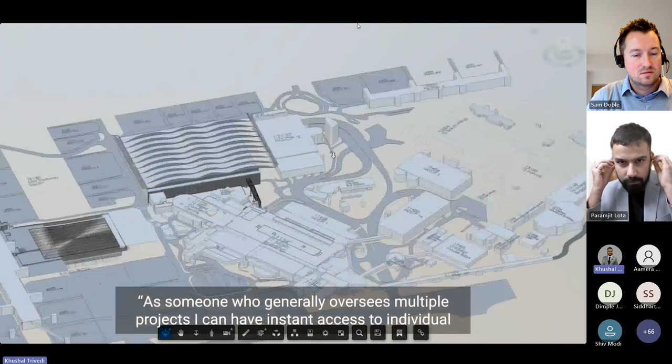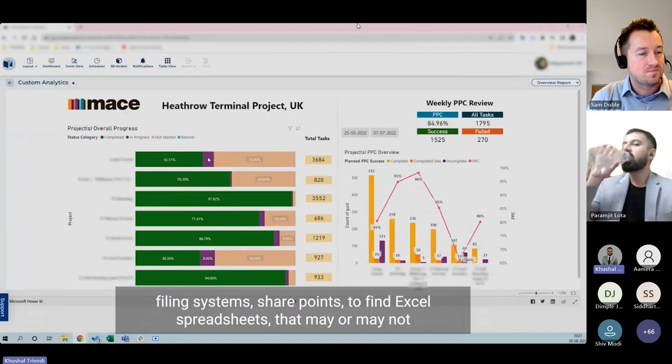A digital tool, the benefit of having that is the single source of truth, to keep everything in one location. As someone who oversees multiple projects, I can have instant access to individual projects at the click of a button. Whereas before that would mean trawling through filing systems and SharePoints to find Excel spreadsheets that may or may not have been uploaded by certain individuals, I can now be given access and click on the tiles to see the performance of those projects.

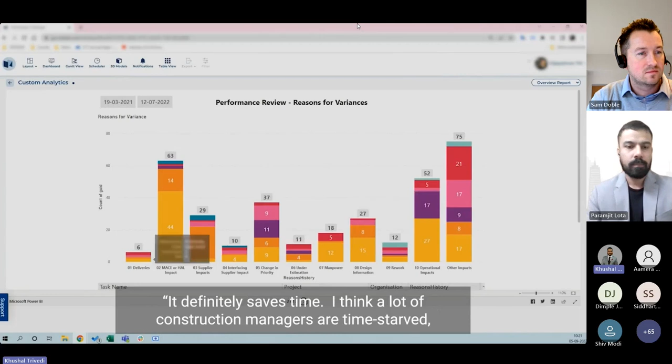It definitely saves time. I think a lot of construction managers are time-starved, so the more time they can save, the more they can get done. And I think the main benefit would be if you can get out of work by 6 o'clock, get home, have your dinner and relax for the evening - you're far more productive.

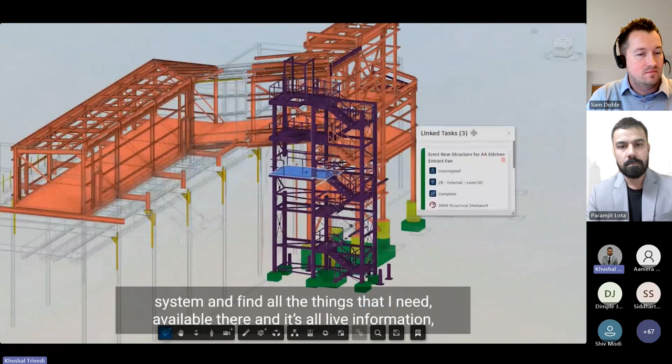A digital platform such as VisiLean is very optimal because I can actually log on to the system and find all the things that I need available there, and it's all live information, so I'm not looking at past data.

The two biggest benefits would be within our construction management team. Traditionally, our construction manager would have to collate dozens of spreadsheets into a single format to then present and coordinate within a meeting, and then all of those outputs had to be manually put into graphs and charts to identify constraints and reasons for delay. That was a very manual process up front and at the tail end of it as well.

With bringing in VisiLean, there is none of that at the front end. It's all accessible either by an app or on the computer. It can be done daily or weekly, whatever time frame suits, as long as it's there for the meeting. There's no having to bring that together - the software does that for us. And post-meeting, the dashboard, the outputs, the constraints are all just there for all to see.

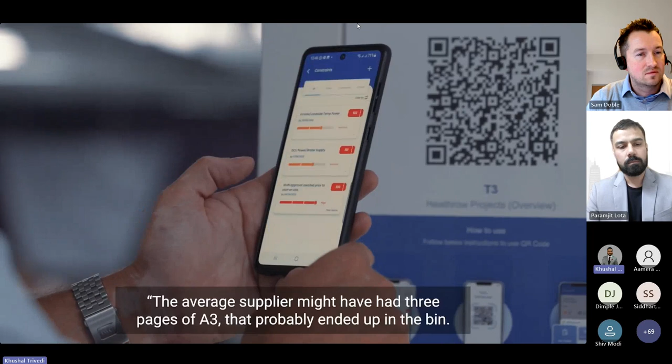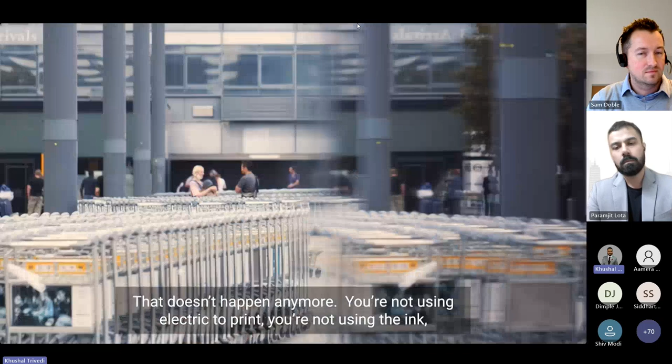The average supplier might have had 3 pages, A3, that probably ended up in the bin. That doesn't happen anymore. You're not using electric to print, you're not using the ink, and you're not using the paper, because it's now on the screen. So there's a benefit there.

The VisiLean software and the way we're using it is used to plan the works very well. It's collating everybody's activities, linking it to a program, which was never really done before because they were separate platforms. It's the same process, but digitally made easier to do. There's all those little benefits that nobody sort of sees - sometimes they just look at VisiLean as the global.

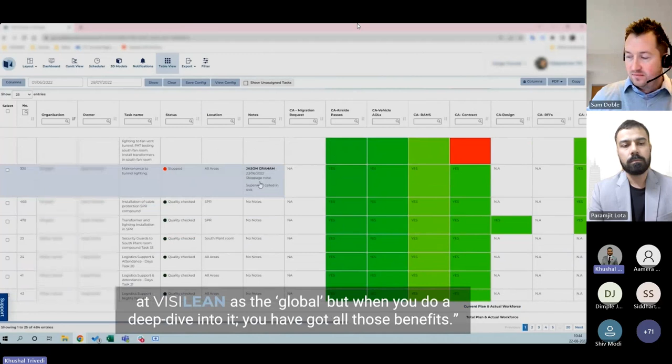When you do a deep dive into it, you get all those benefits. The VisiLean platform is ideal for any build project. It could really be a one-stop shop, growing on from where we started. I find VisiLean to be very user-friendly, very collaborative and very helpful. If I send an email to VJ or Darren or another, I've generally got a response very quick, and that's a breath of fresh air.

The whole VisiLean package fully understands that there's a lot of people out there who haven't been brought up in a digital age and they need to be helped along that journey. The important thing is you've got the support. A system is only as good as the support behind it, and I think with VisiLean, the support they give is superb.

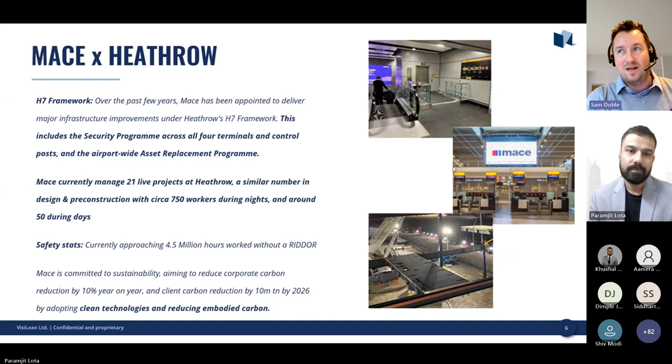That's a 5-year framework, the spend plan essentially that Heathrow say they want to spend on upgrading and maintaining the airport environment. There are other delivery partners at the airport - we've got Costain, Ferrovial, Volker Fitzpatrick, and others coming in. Those are some of the key ones, but we are by far the biggest, with by far the biggest amount of work there.

Under the framework, we've got to deliver the terminal security upgrades program across all 4 terminals. You may have seen in the news that there's a mandate where next summer the airport has to allow a 3D scan of all the bags - when you go from landside to airside, bags are scanned on a 3D image rather than just 2D. So all the machines, the CTIX and ATIX lanes, need upgrading throughout the airport, to lift the level of control up.

From that point, you'll be able to take laptops through without taking them out of the bag, and take drinks or liquids through in excess of 100ml. That will be a result for everybody. It's something we're doing at Heathrow across all terminals, going very well - there's about 150 security lanes to upgrade, including colleague search lanes, passenger search, royal suites and other areas. That's airport wide, a huge program worth about 250 million in turnover overall.

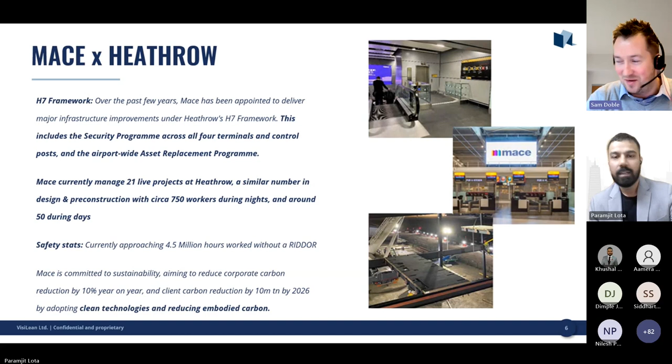Thanks a lot, Sam, that's fascinating. Before you tell us a little bit about how technology has been helping, just on those projects you described for us right now - typically what sort of duration are you looking at? How short can these be, and what do they typically go up to? Are you talking a week, a few weeks, or typically 3 months? What are we thinking?

Good question. So probably the longest project we've got at the moment is the cargo tunnel, which is the one we're going to go into in a bit on the case study.

That's a 3.5-year program as it stands. Generally, we have terminal security projects going on for quite a while at the moment because they're very piecemeal, done in a logical fashion. We're upgrading all of the security lanes, but you have to do it in a staged fashion because we've got a minimum throughput that's got to be maintained throughout. When you start taking lanes out to put new ones in, you're reducing passenger numbers going through. So they're a very methodical, sequenced approach with multiple phases, spreading out for 2 to 3 years. Then coming back the other way, you've got some projects delivered in maybe 3, 4, 5, 6 months - really depends on scope. But if you took an average, you're probably looking at about a year duration of projects on site.

And prior to that, there's all the pre-construction design that we get involved in. So even if it's a small job, the quantum itself is so much that it will take you time, and the planning and the way you're going to deliver it is going to be spread out. We quite often have to explain to the client, whether it's a small job of £500,000 or a £100 million job, it's still the same planning, it's still the same process you have to do. Even though there's less work to do, it's still the same process for teams to go through.

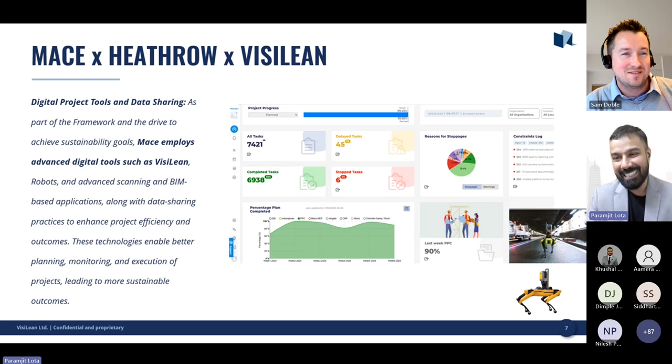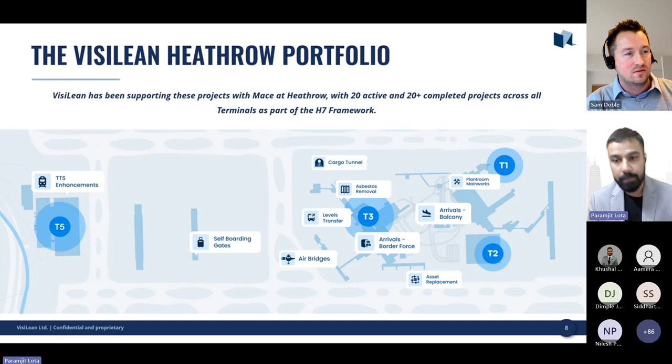Thanks a lot. Okay, just on this, I'll cover this one quickly. So with Mace right now, it's been more than 3.5 years. Like I said, we've been working on numerous projects. That's the portfolio we have deployed across multiple terminals, as you've seen as part of the H7 framework. So right now, as of today, we've got around 20 active projects, and we've finished more than 20 projects already in the range that Sam was talking about. So that's what we've been up to - all sorts of projects, and we'll be looking now, I think, at the cargo tunnel in detail very shortly.

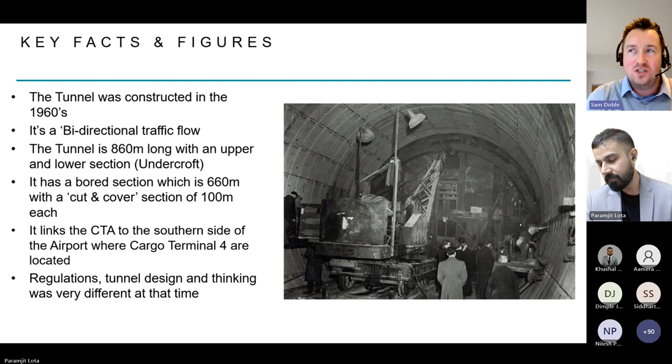I probably have to rattle through a few of these slides because I'm conscious of time—I'm halfway through our presentation already. So, cargo tunnel, this is our case study. It's our largest ever single project that we've done at Heathrow. Current budget for it overall is about 140 million.

While we've got programs that are bigger than that, as an actual individual project, and the complexities and challenges we face with it, this is quite out there and a real one of a kind, where some of the stuff we've done here has been first of type, never done in the UK. A very cool project that I was first involved in at the back end of 2019.

I was asked to look at it as a bit of a sprint study, because it had been partially designed, and then they asked Mace, because of its complexities, to have a look at if we could deliver it with an off-site manufactured approach and take on that complex challenge of delivering this project without upsetting the airport.

So you've got a tunnel constructed in the 1960s. They lined it with asbestos and things, which sounded like a good idea at the time, now causes us a big problem.

It's a bi-directional traffic flow tunnel, single bore. Quite often now tunnels have two bores, which makes life easy when you come to do upgrades, because you can close one bore and do works on the other. This one, however, whatever we've done, we've had to maintain operation the next day.

So we've been working extended night shifts, from 9 p.m. to 5 a.m., on this tunnel, and it's had to go back to being a live operating tunnel at the end. In order to maintain it as a tunnel and be able to operate it, there's a set of minimum operating requirements—essentially certain systems have to be in place and up and running and live. So to upgrade to new, we've had to keep the old assets running, and not affect them.

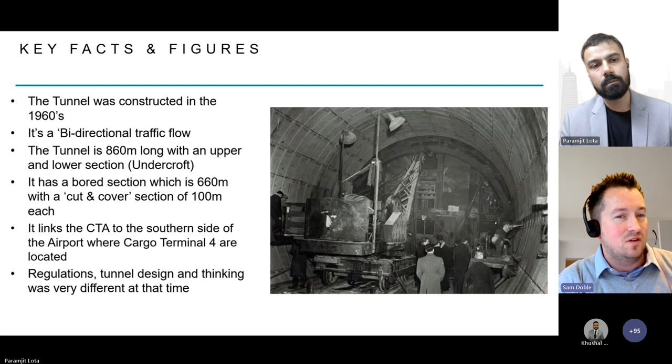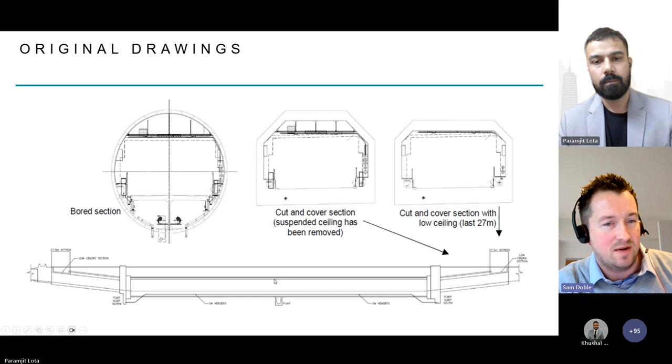So yeah, that's what it looks like in cross section. You've got an undercroft section underneath the bore area that provides ventilation—a supply air ventilation system comes through the tunnel, which is then extracted from the top and goes out into the north and south plant rooms. Cut and cover you can see either end as it starts to come out of the ground, in two slightly different phases, one with a ceiling, one without. On to the next slide, please.

You had issues with things going beyond their service life. The assets were well outdated and all needed a full upgrade, so we've had to literally strip that whole tunnel and relife it.

So over the next few slides I'll show you through what we did. A bit more on the scope, a little better to understand. Just a quick run through the usage: it's only for airside vehicles, so there's no passengers going through unless they're on a bus. The passenger transfer buses go through there, but essentially it's freight, baggage, catering, construction and maintenance vehicles.

The key safety systems, this is where the minimum operating requirements came in. You've got forced ventilation, lighting, air quality monitoring, pumped drainage, emergency telephones, services radio coverage, linear heat detection, manual fire call points, fire points themselves, and a fixed firefighting system, which was new. That was part of the newly added system, on top of the passive fire protection system.

One thing with this tunnel is the risk Heathrow identified: if you had a vehicle in there with what they call a 100 megawatt fire - imagine a big lorry full of pallets - if that caught fire in the middle of the tunnel, the fire load would be so great the current systems wouldn't be able to contain it, and there's a risk it could have closed one of the runways or taxiways above. So the risk to the airport was huge.

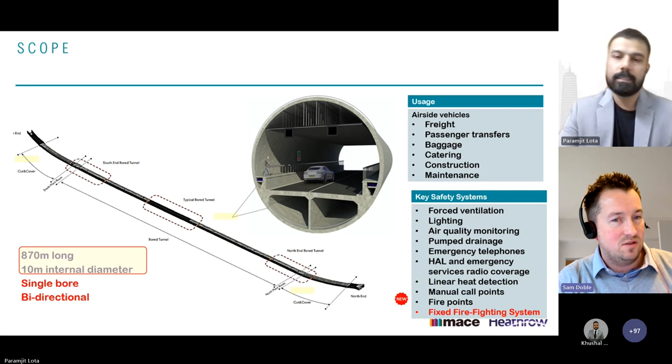Sam, if I may ask - right here on this point, you're constantly referring to how these assets are wearing out, or there's some potential risk of safety or operations being hampered. Can you give us - I know this is probably on a different tangent - but it'll be interesting to know what sort of operations are going on constantly at airports to actually review these assets for their safety, applicability, performance, efficiency. Is that just something going on all the time? And is there a team dedicated from the client to keep reviewing these?

Yeah, so you've got a team called the Heathrow maintenance team who are in charge of maintaining all the assets. Each asset will have its own life expiry - an asset might get put in with a 20-year lifespan, and there'll be a maintenance regime to take place. Think about a car: it needs regular maintenance, and at some point your car gets to the point where it's probably not going to go on anymore. Same kind of thing with the assets here - they need constant maintenance, and they get to a point where the cost of maintenance starts creeping up quite substantially and gets a bit exponential, at which point it's time to change it over to something more suitable or more modern. On top of that, there's also efficiencies that come from more modern designs. Take the low voltage switch panels for example - they were put in like 1950, 1960, and we've been changing some of them. Their life well expired, to the point they're not sure if they turn them off, would they come back on again.

So it's just a standard continual cycle of upgrading assets throughout the airport from all kinds of angles, really.

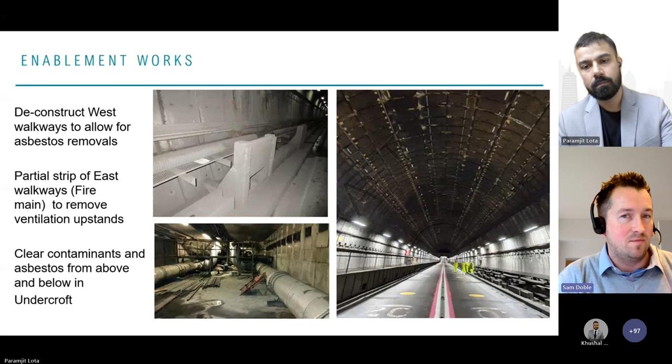And the bottom left photo, you can see the undercroft. So this is what we sort of took over as an undercroft - pretty difficult working environment, that's beneath the main road bore there. On the right hand side you can see all the supply air vents up in that wall, which are then going up to what you see above. So a lot of contaminants, a lot of things to be removed, and this is all part of an enabling works package that went on for about 6 or 7 months before we started the main works. This all kicked off about August '21, I think it was.

So then, just to show some more progress on site - the asbestos breakout, you can see on the right-hand side there with those tents put up around each one. The coordination of this, of course, you've got a very, very risky, well-controlled environment having to be placed in different parts of the tunnel, and coordinating that with other works going on to make sure there weren't any clashes. This is really where VisiLean was started - we launched VisiLean on the project at this point to help coordinate these works. We only had about a handful of subcontractors on the job, but they all had specific jobs to do.

This was quite involved - to get to the point where you were breaking out the asbestos, you had a builders work team in that had to, in fact ahead of that, a services team to strip back services, then a builders work team to go in and do a little bit of work. They then needed the asbestos company in to remove things like asbestos packers out of the way so they could continue with the builders works to get rid of the walkway. Then the walkway was removed, then there was more asbestos work to do, and removal of all this asbestos then went on. So this real big planning coordination piece is where VisiLean really came into its own for us.

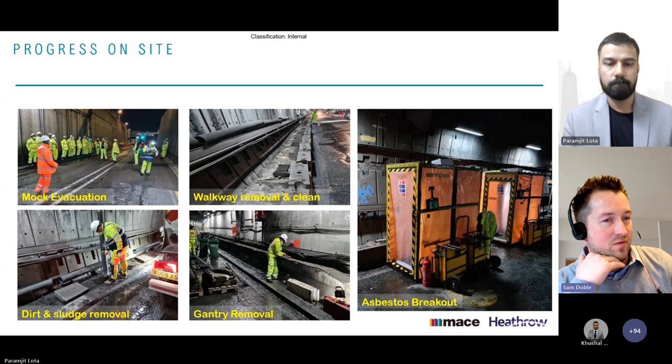And we really started launching it in terms of helping with the project.

Carrying on with some more pictures, the bottom left picture is over at one of the factories looking at the electrical distribution panels, doing a factory acceptance test on those before they came to site. A lot of this was off-site manufacture - in terms of stats, there were over 770 modules installed in the tunnel, up to sort of 12 meters long. You can see one there in that bottom right - that's one of the extract vents.

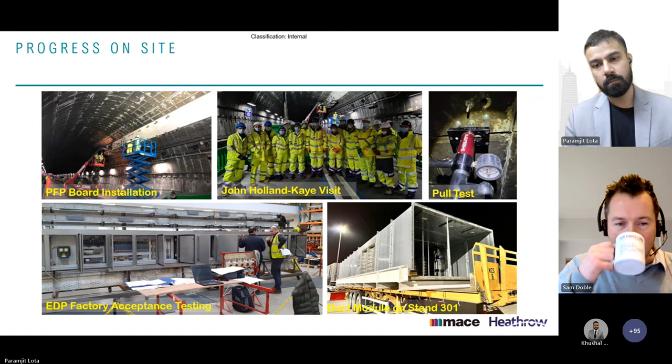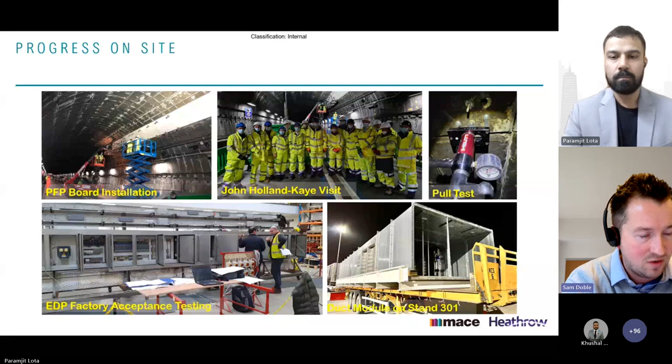Sorry, excuse me, tickling my throat. So that was one of the ducts that was brought in, and you can see there we had John Holland-Kaye, the previous CEO at Heathrow Airport, came along for a visit at night. All of this, as I say, was all being done at night and returning the tunnel back to a working environment by day. So a lot of coordination, a lot of trades down there once we got into the main works.

I think we had about 50 or so in the supply chain, just to give you an idea of the amount of coordination that's needed.

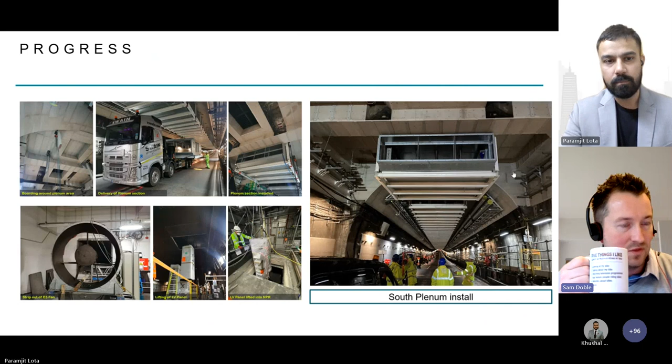A few more pictures here of progress as we start moving our way through the tunnel. You can see this is the interface between the cut and cover section and the bored section of the tunnel. On the right hand side, you can see the ventilation extract duct being placed in, and the cheek modules either side, with the wall sections treated as individual work faces. So bringing all these different areas together in roughly 100-meter sections while keeping people working safely. When you put modules in, that pretty much wipes out the whole area, so only the people putting the modules in can work, but there's plenty of other work to get on with. So a real big piece of coordination there.

Let's go on to the next slide. I'm just conscious of time.

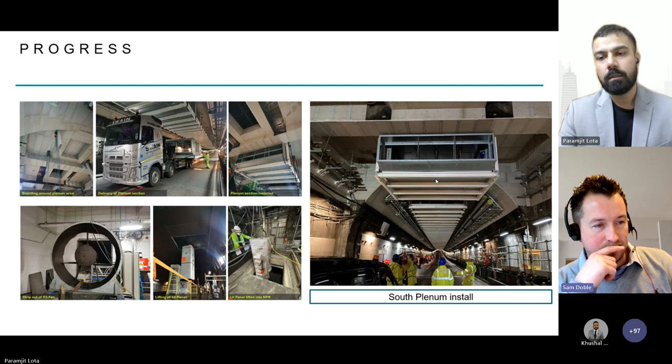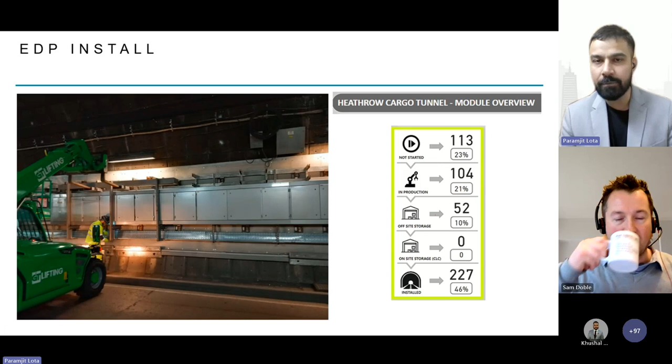Just on this piece, Sam, I was wondering, because this sounds like you've got safety complications, time complications, making the whole thing live and safe the next day for the airport to use. So I think this one's for the audience. We want to know if you've had a similar experience working in challenging environments with challenging timelines, anything similar even on airport projects you've executed. Please let us know in the comments, we'd love to hear about them. Sam, I think we can discuss some of those down the line, so please do share your experiences.

One thing I haven't touched on yet is the C2P approach, construction to production, essentially DFMA by another name. So pushing a lot of the works offsite to manufacture in nice factory environments, giving a real good quality end result that's brought to site. In terms of the time frame, if we tried to do this traditionally, doing a few hours every night of traditional install, it would have extended the program for years, literally. By pulling things off into a factory environment, bringing them onto site completed, and linking things together in 6 or 12 meter modules, you very rapidly complete these works across this very long repetitive tunnel. That was a massive feat for this job, really. Probably no other job where we've had that much off-site manufacture.

But the coordination piece became really important because there's no storage at Heathrow, so we weren't able to get a load of modules built and bring them in. They had to be brought in just in time, ready for that particular shift. We might have gotten away with a backlog of maybe one shift's worth of modules. So the coordination and planning ahead, making sure we were monitoring the off-site builds and knowing what modules could come to site when, came back to the whole coordination piece using VisiLean in each tunnel section and module, making sure they were planned and brought to site on time.

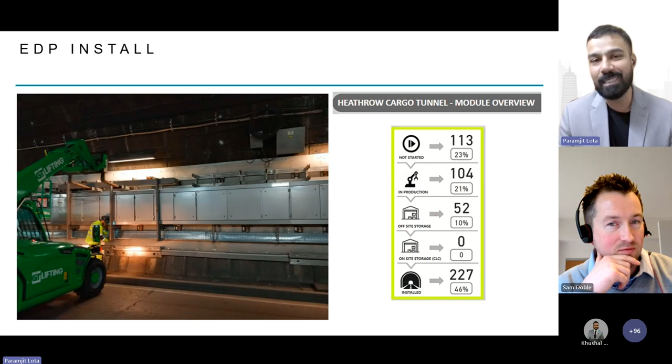That reminded me, seeing that caption on the right hand side of how many we had in off-site storage, how many in production, how many not yet started. On-site storage you can see there, zero, and installed 227. I know we have some players from Mace itself in the audience, and some other clients from the same organization who've done similar off-site work, so I'm sure they can share that experience too. But it's been good to work alongside.

Right, okay, let's go on to the next slide then. Absolutely.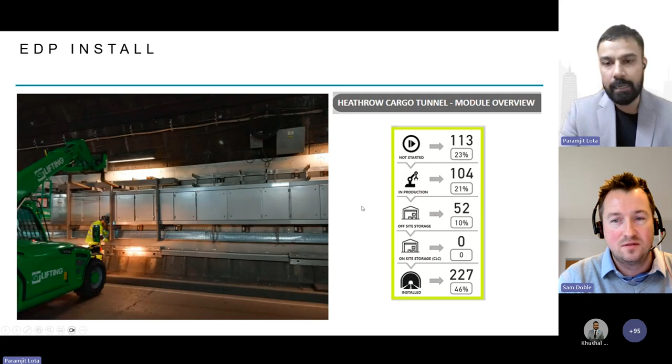Okay, so we then got to a point where we needed a prototype, to bring the stakeholders along, engage them, and show them what it looked like. This is our first tunnel section of about 25 meters done with all the main components placed in, vehicle impact protection barriers protecting the electrical distribution panels, some of the links put into the module there. This was quite a big event for the tunnel, getting this prototype viewed and signed off by the stakeholders, because no one had ever seen it before.

We'd seen it on plans, seen it drawn up in design, but never quite seen what it looks like in the flesh. So we brought them along for the journey on this one, and from there we had a lot of learning from it as well, I must say.

There were a lot of things that looked good on paper that didn't quite work on site. In particular, trying to get a curved tunnel lining to meet square and rectangular surfaces was very, very tricky. So a lot of learning, but with repetition you speed up as you go along.

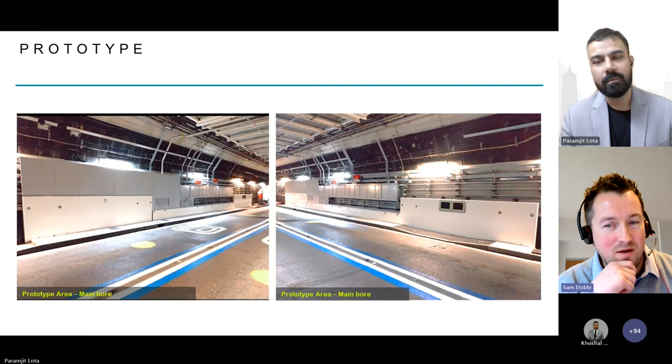And did the sign off go smoothly? Did things get accepted quite easily? What was that like?

The actual sign off was quite smooth. I think everyone was impressed with what they saw, but the process in getting there was difficult - very, very tricky. A lot of redesign of elements just to get it right and get it nailed. But at that point it was good, and it really flowed on after that.

So just a few things here - thinking outside the box, a massive, efficient site operation, really efficient putting modules in and maintaining.

You've got a single bore tunnel with two road access routes, but we've had to also allow materials and deliveries to get down to particular areas of the site you're working in, as well as hoard it off and coordinate the works so people weren't working over and above each other. Quite a tricky constraint down there with the tunnel, and again it comes back to really coordinating the works efficiently.

We use the latest technology - we've got Boston Dynamics' Dave the dog that you may have seen online. Dave used to wander up and down the tunnel with a Trimble device attached to him that would spin round and give us the as-built layouts. Essentially a bit like Google Maps - at the end of it you can go through and visually see a 360 image all the way around the site and keep up to speed with the as-built information.

And then, as we've touched on already, a lot of off-site construction - not just for the tunnel modules, but the north and south plant rooms as well.

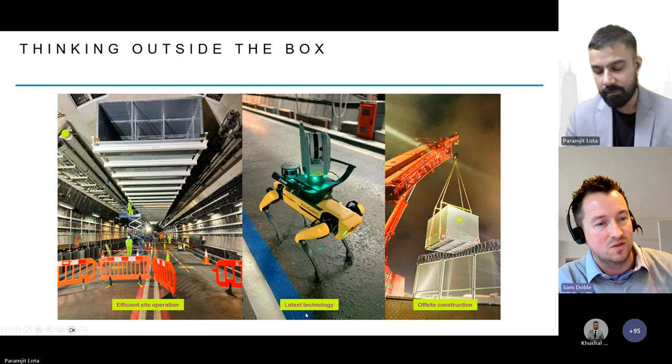Let's do the next slide. So these next couple show what it looks like as of about a month or so ago. We're pretty much in a position where we've finished the majority of the works, and now we're going to start the east side, although this photo shows the west side because of the direction it's viewed in.

Then it's back to finish off the final side, which has got a fire and water main in there. You can see at the top left of the photo these two huge pipes - they're replacement fire and water mains that feed all the way into the main terminal, supplying all the fire systems and giving potable water to the airport.

So we've had to put the new systems in, test and commission them before we can take out the old ones, which are buried on the left-hand side of the road. Then we can do the works along that side as well - the east side works. That goes on throughout this year, along with testing and commissioning.

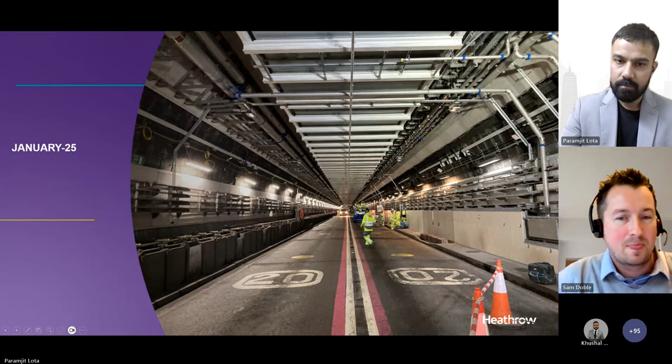The next slide is just a picture of the south plant room modules - a little example there. Those big square, circular and partially rectangular things you can see in the middle of the photo are three enormous extract fans for the tunnels. We've got them in the north plant room as well, but these ones are delivered on skids.

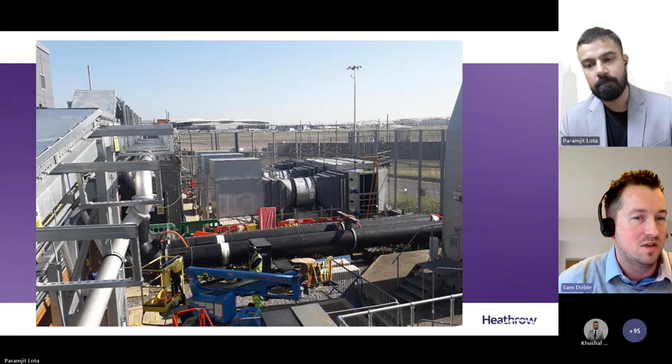Again, lots of the C2P approach - delivered on the back of a lorry and lifted into position by HIAB, then placed straight down and connected up. So again, a real big success and a testament to the off-site manufacturing approach and coordinating all the works.

I think that takes us to the end of that section - that's the end of our case study there. So now I think we're leading on quite nicely, just conscious of time again, into the dashboards and the PPC review.

So we've got a few slides here.

I think Param, did you want to talk through some of these, or do you want me to do it? Yeah, no, it's just I'll cover this bit, Sam.

Thanks a lot. I just wanted to take some time and showcase some of the dashboards that the team had set up for this project.

Sam mentioned PPC became a really important part of the process, and it was very important to ensure that work was being planned effectively. Work was planned for locations and monitored against different suppliers and packages coming together. These were the targets being achieved, with reasons noted for when they weren't meeting targets. 85% is the ideal target you'd have to reach in terms of PPC, so that's what they were monitoring.

For any failures, they would monitor the reasons for variance and talk to the team to discuss and make sure constraints were addressed. There was a lot of focus on constraint mapping, making sure constraints were effectively managed before works would be released. In fact, there was a separate dashboard exclusively done for that.

So you would monitor constraints, and monitor constraints against people. Any constraints that were delayed would be highlighted. Anything holding them back, whether design-related or material-related, would already be tagged and marked. These would be reviewed every week to make sure work is cleared and they're able to achieve those targeted PPCs of 85 to 90%.

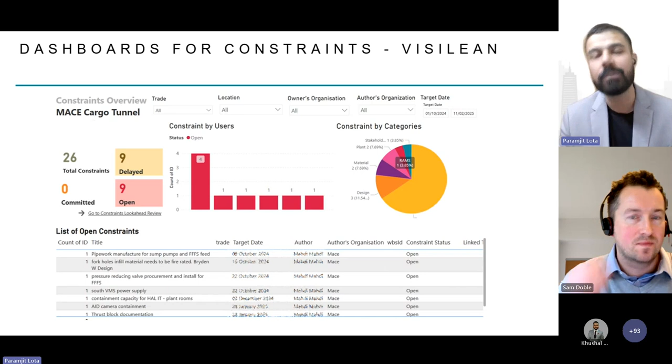So this is a glimpse of what VisiLean has been doing at Heathrow, but there's more detail we're going to show you now. Sam, I'll let you do the introduction to how Mace has been using VisiLean, and I'll get into the details of some of the outputs we've been looking at.

Yeah, sure. We are short on time, so let's see if we can breeze through these. Yeah, no problem at all.

We've been through a lot of the challenges at the airport, but in terms of the challenges here, we've got a P6 system for planning. We were previously doing all the work on Excel, or coordination on Excel, which was fine from a usability point of view, but very manually intensive, having to pull together all the Excel documents from each supplier into an overall coordinated plan and review that against the program. The time to do that properly was quite excessive.

What we've got now is an integrated system where everybody can log on. Mace can log on, the supply chain can log on individually, and everyone inputs into the same live working platform ahead of meetings where we coordinate for the upcoming 8 weeks, looking at constraints that would otherwise stop the program being achieved, and the 2-week work plans where each supplier gives us their works for the next 2 weeks. We commit to the following week of work, and also look back to the previous week at what we planned versus what we actually did, and any reasons for deviation, taking that learning forward through the job. If we start seeing trends that design's a problem, we can address that up the line and make sure those blockers are relieved going forward.

So what we achieved overall: a single source of truth for the entire supply chain, one place, one-stop shop to look at the coordinated plan. We proved the success across 20 plus completed projects, and are continuing that success on the 21 live projects we've got at the moment.

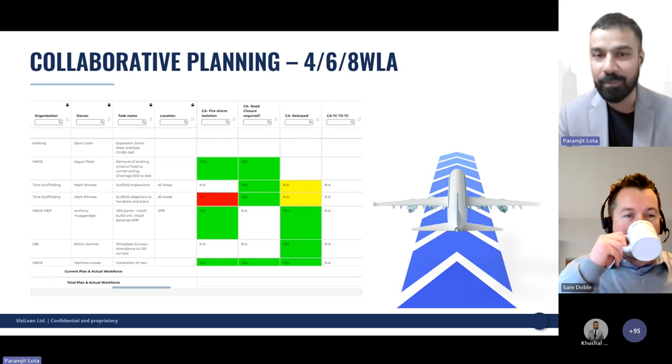So this piece, which he's conveniently spoken about, in a nutshell: 8-week look ahead, 2-week make-ready process, getting these going, constraint mapping, and learning from it. It's a lot more complex than it seems, just by the way Sam makes it sound very easy.

But the suppliers would bring in all of these spreadsheets. Boris spoke about these prints that they would get, and you're looking at a whole lot of paper and just hard copies of submissions. As you can imagine, Mace, being the general contractor, has to sign off on everything and basically clear any work that is going to happen on site the next day or the next week. That is immense responsibility when you're talking about any work that happens at the airport.

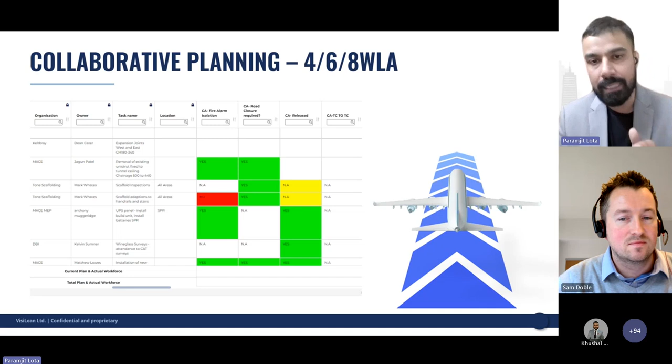So this customization makes sure all the make-ready needs are met. The make-ready requirements here are all clearances that had to be achieved by all suppliers for each and every activity. If you notice, there are reds, and reds basically say no, that's not possible, that's a no-go. Green would be a clearance, and not applicable would pass that requirement. All of these make-ready requirements were listed out and tracked, and Mace would look for this clearance. There were no more spreadsheets required.

You replace almost 2 to 3 spreadsheets per supplier, ranging anywhere between 8 to 15 suppliers per project. So this whole process, going from 8 weeks to 2 weeks, making sure the weekly work plans are cleared off by Mace, just became a lot smoother. That's the detailed version of what Sam was just describing.

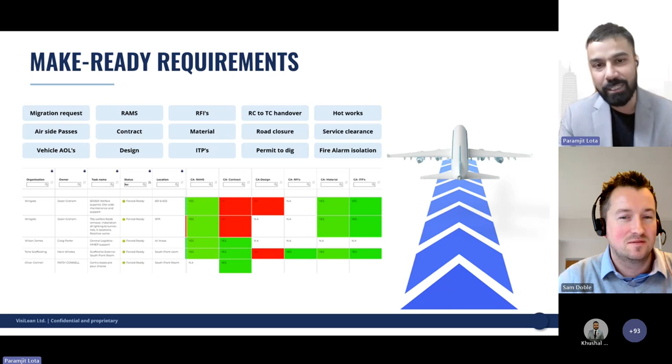The constraints would be reviewed very effectively too. In terms of updates, one was the clearance of work and making sure the planning was effective, but also making sure you're getting the update back from site, getting that information about performance and making sure it's being reviewed.

Any challenges are also pushed back and reported in the right time, making sure you can track even workforce and quantities. So you can make sure all of the updates have the information you require. It's not a delayed response like 'oh, I started late but forgot to update' - it's very real time, very effective, and with a lot of information.

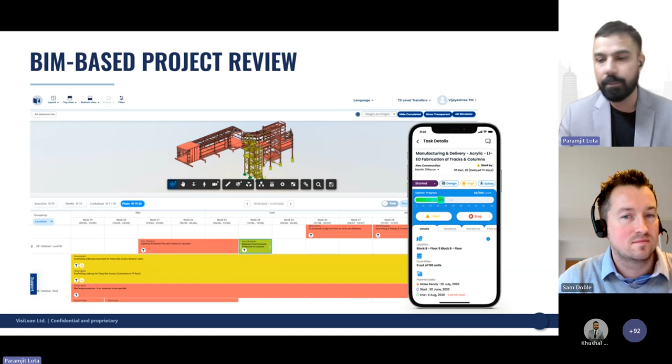So all of this combined together and also plugged in with BIM visualization. In a lot of cases, we were able to actually bring in BIM models as well for certain projects.

We've also managed to get the BIM model for the overall portfolio review. This was actually a block model of the entire Heathrow Airport with all the different terminals connected to their sub-projects in VisiLean.

Across the different terminals, you could have a one-pager overview. Sam, you've looked at this before - pretty useful for most senior reviews at a high level, just to see what sort of work is going on where, and also which terminal you're expecting the next job in, or where most of the work is going to happen.

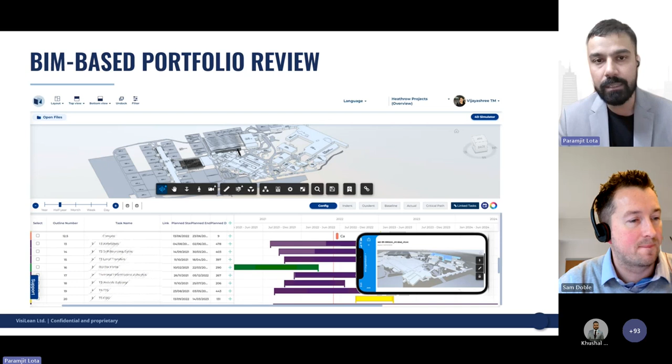So these were some of the ways in which Mace was actually able to do a lot of the reviews using VisiLean at a very high level, and also maintain an overall tracker across all of their projects.

This is not just Heathrow - this is actually aviation projects overall with Mace, with VisiLean. So this covers Gatwick and Manchester as well. You would be able to check trends of performance of PPC across these projects.

You could filter out to any of these projects to look at more details, but you can start to see all of the reasons for variance collected in one place. So centralization of all of the information was very effective.

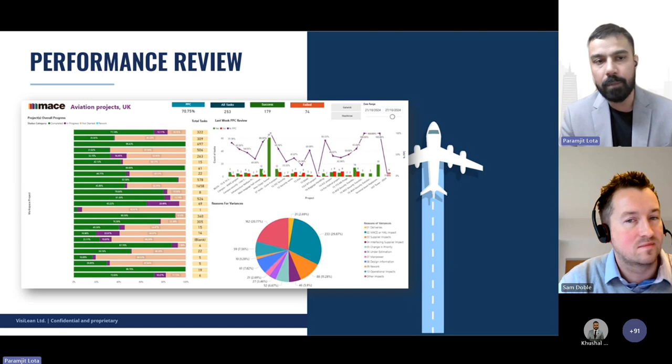And there's a lot to learn from Mace and how they've delivered these, so hopefully you get some insights on that. Sam, overall benefits, I'll leave it up to you to describe - you're the ones who've hopefully gained them.

I think there's a dual purpose benefit here in terms of saving time for the planners. One frustration we've had at the airport, in being open and honest, is that the construction team really needs to be driving this process, but it often falls back on the planner, which puts more pressure on them. On jobs where it's running really well, the construction team helps input into this, and when it runs seamlessly with the supply chain buying in and doing what they need to do before meetings, it's a very seamless process. Where it falls over, and puts more time on the planner to do the work for the supply chain, is where the supply chain doesn't do what they're meant to do ahead of the meetings.

So comparing using VisiLean with a coordinated approach working well, versus using Excel spreadsheets where we had about 3 different overall spreadsheets, plus a spreadsheet from every single supplier that had to be manually pulled across, there's a lot of time saved. I'd say probably even in excess of 2.5 hours a week compared to what you get out of VisiLean. But the key emphasis is making sure it's running efficiently and everybody buys into it. I can't stress that enough.

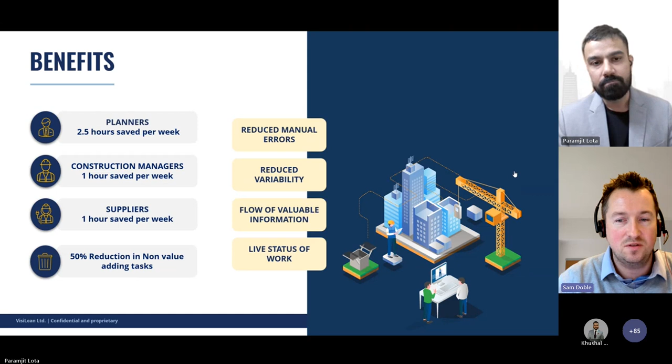That brings us to the end of the presentation. Was that the last bit? I'm being told by the team that we have a lot of questions to look at, so let's get to that. But before we reach the questions, I'll stop sharing so we can look at some of those in the chat. Sam, closing remarks from you please, people are going to want to hear.